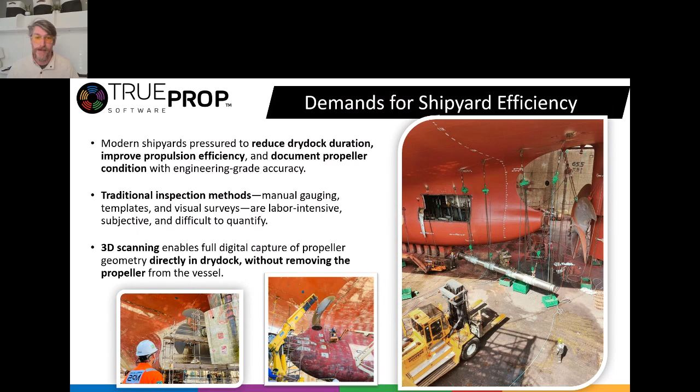Now, traditionally, propeller inspection has relied on manual gauging, templates, and visual surveys. These methods are very time consuming. They're subjective sometimes, and often they only provide partial geometric information about the propeller. So today, full 3D scanning allows us to digitally capture the entire propeller geometry directly in the dry dock. We don't have to remove the propeller. This allows us to create a precise digital model that can be used for inspection, reporting, and even further engineering analysis.

The key benefit for shipyards and people managing shipyards is the time and cost reduction. Many yards traditionally remove the propeller from the vessel and outsource the work to a dedicated repair shop. Removing the propeller requires a crew, scaffolding, cranes, rigging, transport, and all the associated costs. A slightly better solution is to outsource that work to a mobile propeller service to perform it in the yard. But nearly all shops use some form of manual measurements. So by utilizing full 3D scanning tools, there's a major opportunity for significant savings.

First, dry dock time is expensive. Rapid in situ scanning can reduce inspection time from days to hours, freeing dock space sooner and improving the yard's throughput. Second, labor costs drop significantly. Instead of large crews taking manual measurements at multiple stations on the propeller, a small scanning team can completely capture the geometry in a single workflow. That reduces scaffolding, rework, and repeat inspections due to missing data. We capture a full model of the propeller so that we don't have to go back.

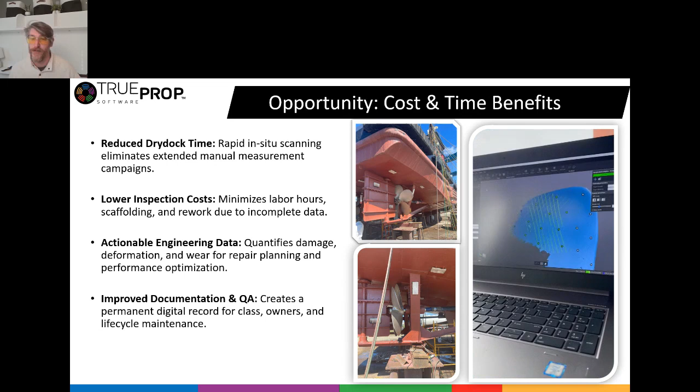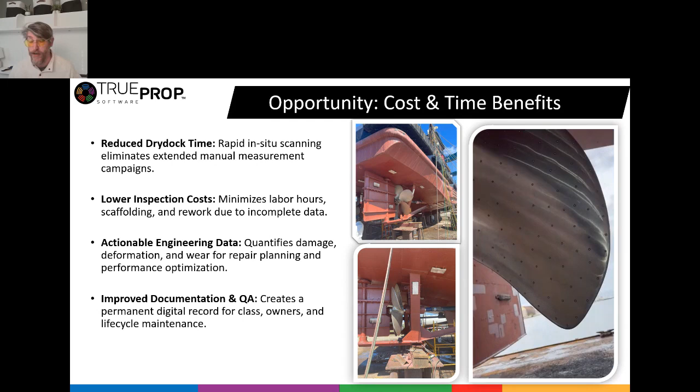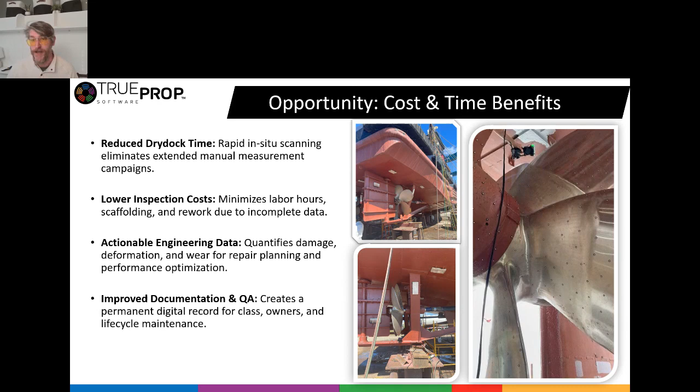Finally, the 3D model becomes a permanent digital record. The life cycle of a ship may be up to 50 years, and it may go through multiple engines and multiple propellers, so having a full 3D digital model is really important. It supports QA documentation, owner reporting, and life cycle monitoring. It allows you to look at future performance optimization. So the conclusion here is that 3D propeller inspection transforms dry dock surveys from a manual check into a data-driven engineering process that saves time, reduces cost, and improves technical outcomes.

So let's look at what this means in practice. In a typical dry dock, a full propeller inspection using manual templates and gauges can take 1 to 3 days, depending on the size of the prop and the access. And if you had sent it out, paid for the rigging and the transport to a specialist, you're waiting on their schedule, and then they send it back to you. That might be a 1 to 2 week turnaround time. With a modern 3D scanning workflow, that same inspection can be completed in a few hours.

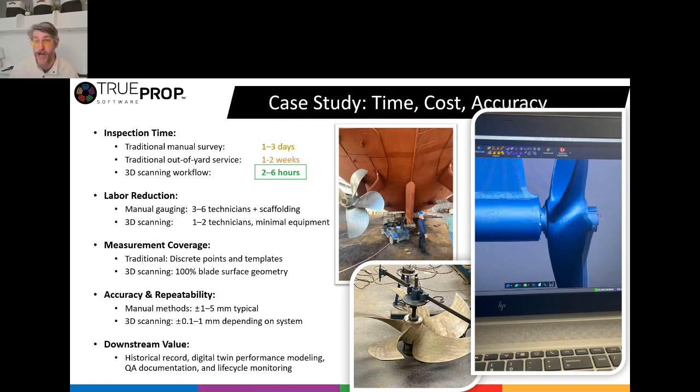Now let's look at the labor differences. This is another major factor. Manual surveys often require multiple technicians, scaffolding, and repeated access to the prop. With 3D scanning, we could do that with a small team, usually just 1 or 2 people. Recently, we did a 110-inch prop with 2 people, and it took 4 hours to do 2 props. That allowed us to capture the entire geometry, both sides of the propeller, which aren't traditionally inspected. A lot of times they're focused on the pressure face.

So now we're getting a full 3D of both sides. And that kind of brings us over to measurement coverage. This is where the real technical shift happens. Traditional methods, they measure discrete points and sections.

Now the 3D captures the entire blade surface, every square millimeter, allowing us to detect subtle deformation, erosion, and manufacturing deviations. The accuracy and the repeatability, they're significantly improved. Depending on the scanner, we can actually achieve sub-millimeter resolution.

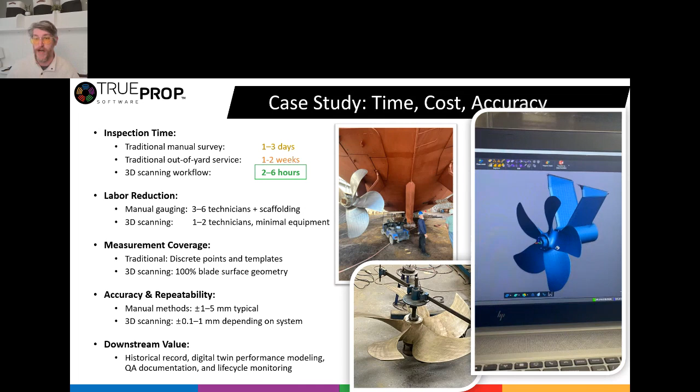And it's a non-contact process. There's no deflection in the template or the drop rod that's probing physically on the surface. So the results are super repeatable, digitally traceable. And the output is not just an inspection report, but it's a full digital twin that can be used for repair planning, documentation, and long-term performance tracking across docking cycles.

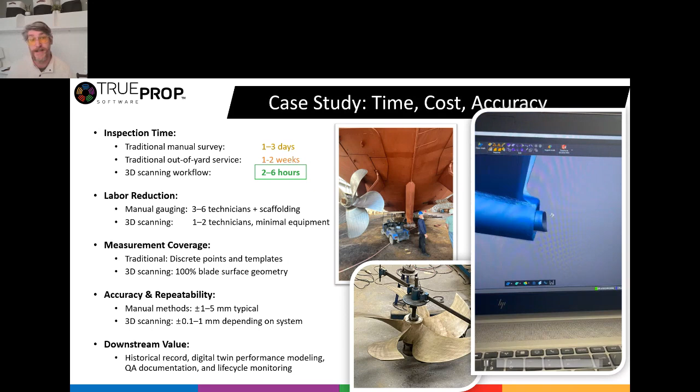So all of this enhances the outcomes for the shipyard, and it provides numerous benefits that can instantly give you a return on your investment. So now let's talk about propeller quality.

Any propeller that you inspect, even a new propeller, will have some geometric variance between the blades. Now, whether this variation was from the manufacturing operation, delivery, installation, striking something during operation, we know that variation will have some effect on the prop's performance. So we'll just refer to the variations as damage now. It may not be damage, it may have been born that way, right?

So damage to even a single blade, it changes the loading on the blade, which leads to more losses, more imbalances, and that directly impacts the efficiency of the propeller. So that's less thrust and higher power requirements, and that's going to reduce operating speed, higher fuel bills, more noise, and more vibration. And if left unrepaired, that can really damage the bearings, gearboxes, and other things upstream, due to those eccentric forces and imbalances.

So, these propeller issues are common, and not all of the damage is obvious from a visual survey. And that's why regular inspection of the propeller is so important. And again, if you are struggling to fit propeller inspection into your dry dock schedule, this is a way to accelerate those timeframes and get even better data out that covers that for you.

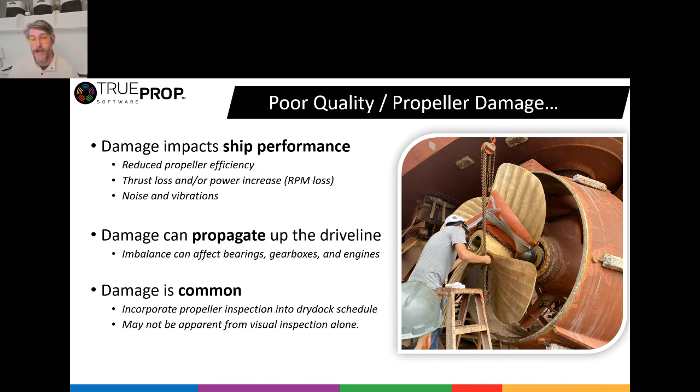So when we're inspecting a propeller, we are checking the geometry of each blade to minimize that variation between the blades. It's that variation that really alters that relationship between speed and RPM and engine load, and differences between blades or damage to blades. Sorry about that, gotta go back there. That leads to reduced top speed, increased fuel use, all that stuff.

When we inspect a propeller, even with gauges or manual measurements, we are taking pitch measurements for each blade of the propeller. And a lot of times we'll visualize these with bar graphs where there's a tolerance and there's a window of acceptability. And then we're plotting each blade against that. And we break this down by blade, by radius line, and we even break them into smaller segments.

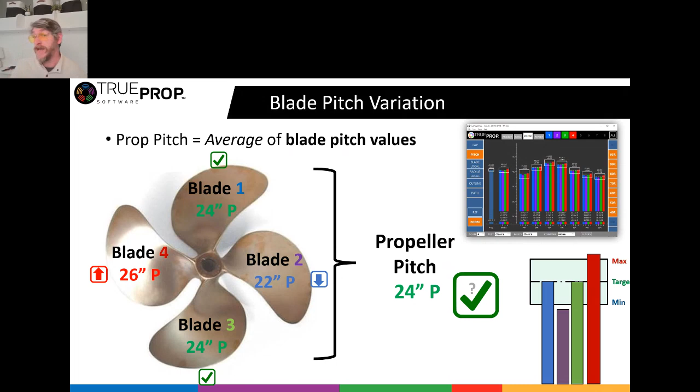Sorry about that. That measured pitch can vary from the target pitch by some specified amount. So it's really important that we're checking to make sure that all of our measurements are within this window. So whether you're doing it manually or with 3D scanning, this is kind of the objective, is to check those and balance those out.

So how do we know how much variation is going to be acceptable? Professional repair facilities use a standard called ISO 484. That's a manufacturing tolerance for marine propellers. And this standard has long been the metric for inspecting both commercial and recreational ship propellers. There's 4 classes to document the condition. S is the tightest class level, then 1, 2, and 3, with 3 going to the widest tolerances.

And those inspection methods, they're outlined in ISO 484, and that's what's used to calculate the geometry for each blade. This is the standard that we use for compliance. So, what our team does and what our software does is basically allow us to go from the 3D model or the inspection data to the documented report. And that's really the end goal of this, is to document compliance, right?

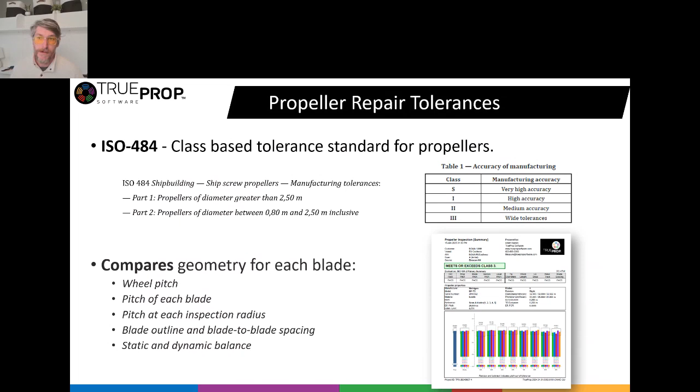So let's look again at kind of how this process works. We're leveraging commercial metrology equipment. Typically, this is handheld blue light laser scanners. And that gives us a new way to inspect the propeller, again, without having to send it away to a specialist, without having to remove it from the ship or pay for rigging and transport. So in scenarios like maintenance and dry docking, that's a super valuable thing. Again, it accelerates the timeline and it reduces cost.

And there's lots of options for 3D scanners today. They are very accurate. Typically, they're much better than the traditional probe-based measurement tools or the gauging and the template option. And one advantage is if you scan the propeller and it's in good condition and you haven't removed it from the ship, you're bypassing a lot of unneeded labor for the removal and for the rigging.

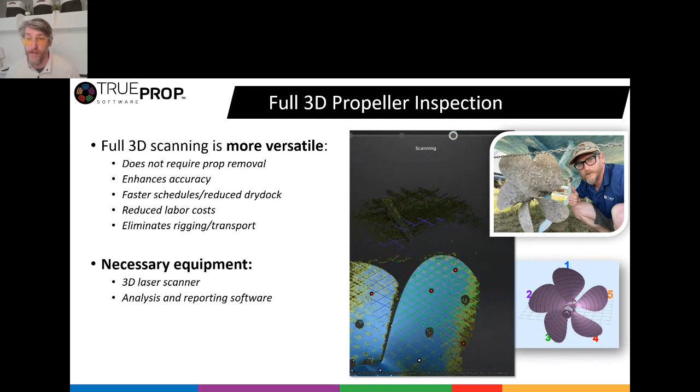Here's another example. We can see a large propeller being scanned. I want to point out that this technology can be used for propellers as small as 8 inches and as large as 160 inches, which makes it super versatile. It's great for controllable pitch propeller blades. It's great for high blade area blades with overlap because you can move that scanner in between the blades.

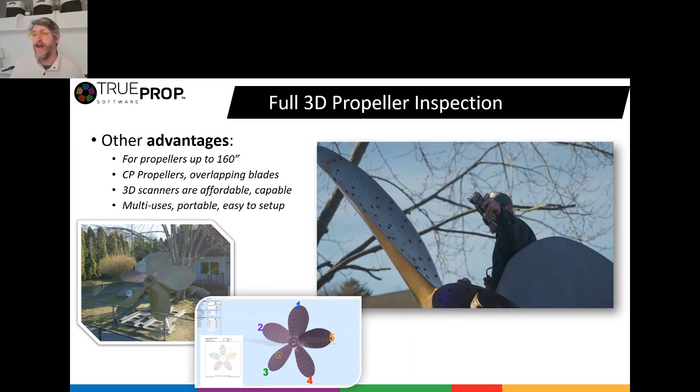And our TrueProp software, our solution, supplements this and makes it really useful. It takes that 3D data that's captured and it extracts the data needed to check those tolerances across the blade. It produces a report that documents not only the 3D shape of the blade, but it's actually giving you the tolerances across the blade. And it shows you any areas that are out of spec for that desired class rating, S, 1, 2, 3.

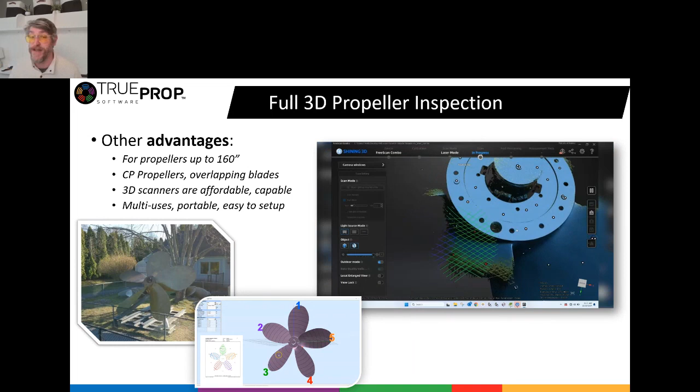So this software is compatible with anything that outputs an STL mesh, and that includes older metrology arms with laser scanners that some machine shops might already have. So you don't need a handheld laser. You can really use anything that makes a digital model, which makes this extra flexible.

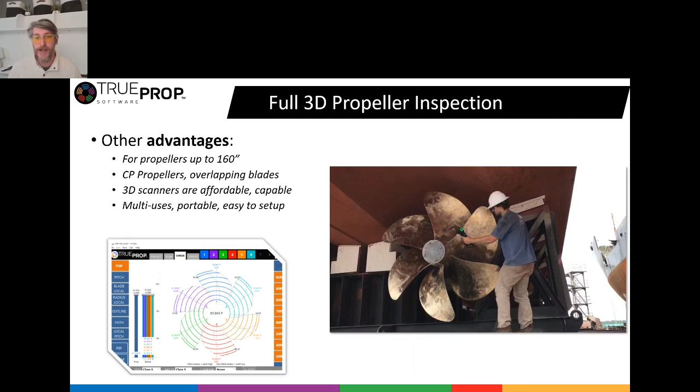Here's another large propeller being scanned. I'm not sure what size this is, but this is, I believe, a Coast Guard wheel. And just another interesting process. You can see how fast he is going through scanning that prop. No other specialized equipment really needed beyond the scanner that he has in his hand, the laptop here.

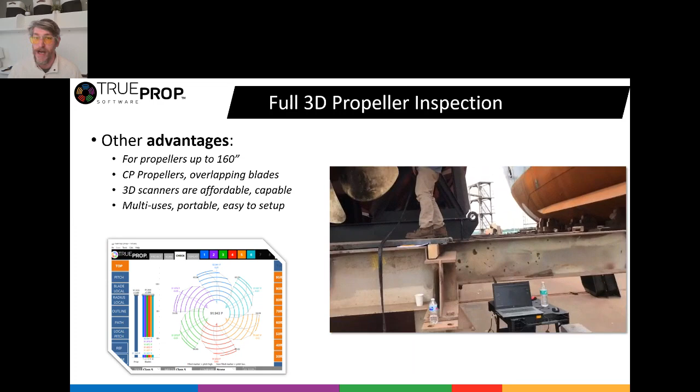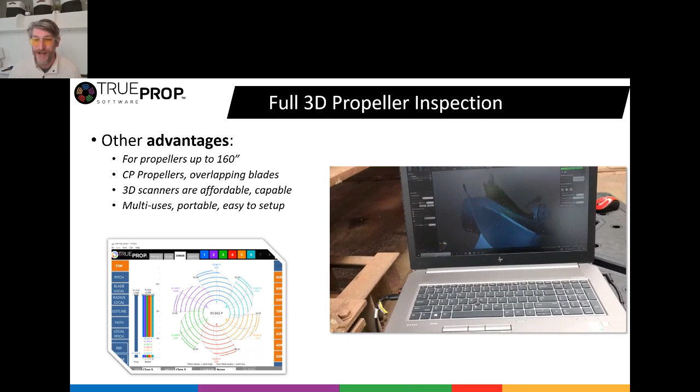And you can see that there's a second operator in there who's kind of helping him. He's watching the laptop, making sure all these areas are captured. So again, 1 to 2 operators, and that would cover you up to 140 inches, 160 inches. I don't see any reason why you would need more than 2. So that's a huge advantage, right, on labor.

And I wanted to show you a few more images here of different scanning processes. We can see a large propeller being scanned. You can see in the hub region here, there's some overlap between the blades, and it's also very, very steep, which would be a little bit troublesome for our typical drop rod based approach. So by going to the 3D scanner, no issue at all.

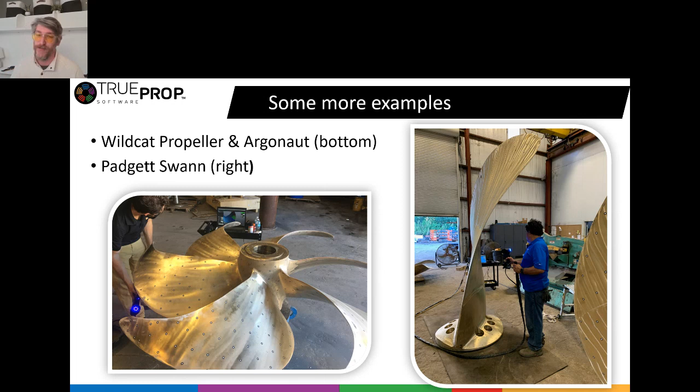And the other example I'm showing here is a CPP blade. So we can inspect these CPP blades without any sort of fixture or original hub or a dummy hub that would traditionally be used. We can just orient the scan model in CAD and analyze it. It's a really, really cool strategy.

Scanning the propeller into a 3D model alone, that's kind of the first step. But to make really good use of it, you need another layer to extract and interpret the necessary data. That's just what our software does for these types of models. Here's a couple examples of the screens there. We can see that we get a 3D model.

We are mimicking the traditional process here with scribe lines at set locations like they would do with a template. But we're doing it all digitally, so it's very quick. It's easy to revise. We are getting the lines that show us the shape of the propeller, and then we're actually showing areas that do not meet compliance on the leading edge of this blade here out at the tip. So this particular surface piercing propeller had some issues.

If we zoom in down here at the bottom, we can also see some regions that are out of compliance right here. You can see that they're exceeding those tolerance windows. And that's why we're looking and noticing damage and quantifying that, identifying it and documenting it.

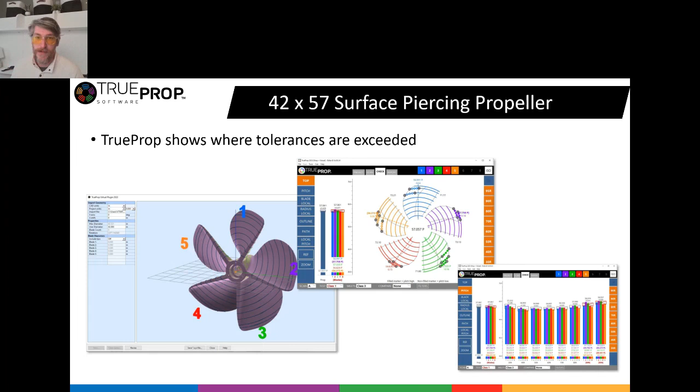Just another example here. This was a large propeller that was inside, I believe it's a tunnel thruster. And so access to this was pretty difficult. It was inside of a tube, basically. But 3D scanning allowed us to capture that geometry without having to remove it. And we were able to extract data right out of it.

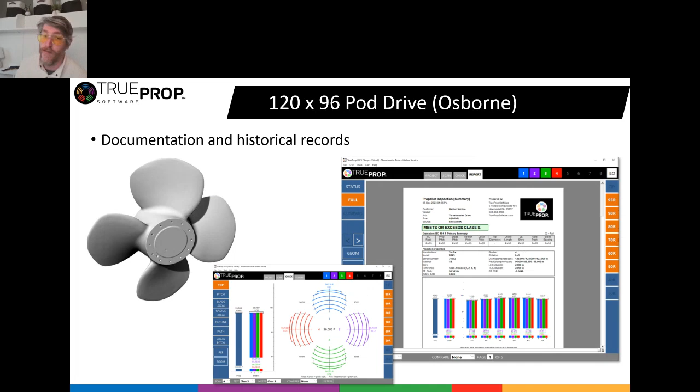Pretty basic design, some pretty tight tolerances. Nothing wrong with this prop, so it was good that we didn't remove it. This propeller here, I believe it's 120 inches. So it was a very big propeller and would have cost a lot to remove.

We can maybe calculate some areas, volumes, and weights, but we want to know pitch, diameter, thickness, and things like that. So, depending on what your objectives are, from the 3D model alone, if you have something to compare it to, maybe another scan or a CAD design model, you can quickly get a heat map. That's a really useful visual, very compelling. It tells a good story, right? But that doesn't tell you anything about the condition.

So we would use TrueProp here to basically check the propeller against its design specs and analyze the tolerances, determine the class. We would also use a product from HydroComp for more or less recreating blade geometry, creating a drawing from a blade to supplement missing documentation, or to create a new blade for manufacturing, to get a new pattern made, a new propeller made based on the scan data we pulled. So there's a lot of things that you can do with that so-called digital twin model.

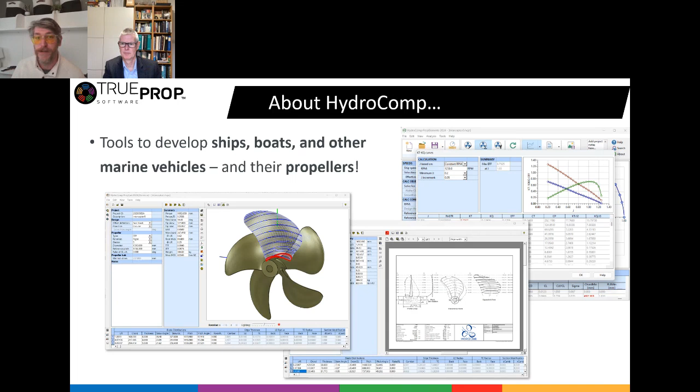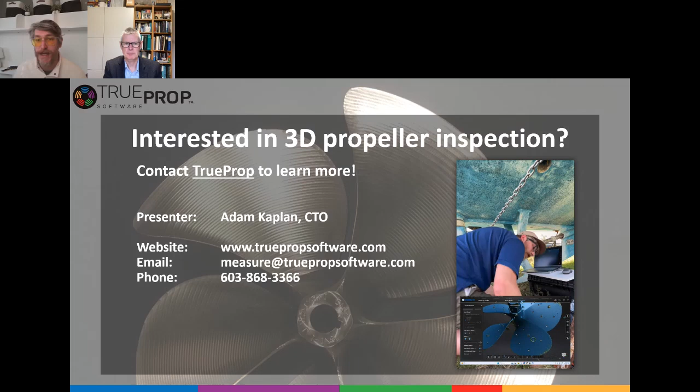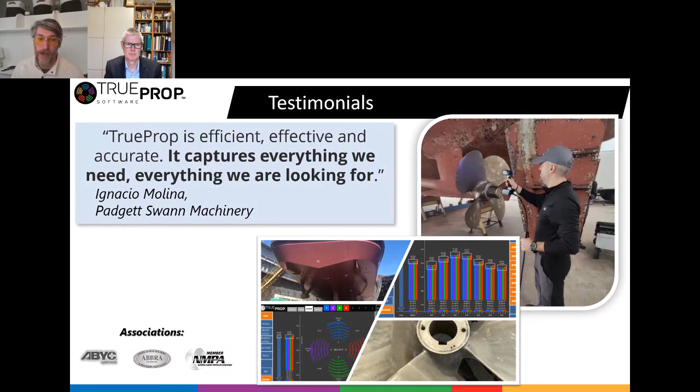So we've got a question here that says, how do you calculate the pitch at a certain radii? Sure. Essentially, it comes down to a geometric formula. Really, it's about the angular span across one of these lines. Let me see if I can get to a good slide here. So we have these lines up here. We're looking in cylindrical lines.

So what we need to do to calculate pitch, we're identifying an angular span and we're identifying a drop. And it's essentially a ratio between those two. The formula itself is a little more complicated, but those are the two measurements you really need, the angle and the drop. And that's really what we're extracting out of the 3D model. Okay, thank you. And then a supplementary: is it possible that there might be no scanned points along the radii?

Well, I would say it depends on your scanner. We have the ability to select the spacing between the points on most 3D scanners today, and the density is usually 1/10 of a millimeter by default. We can up that to a millimeter, or to 5 or 10 millimeters, depending on the size of the prop. What will happen is if the points are not directly on the radius line, when we make a mesh out of the point cloud, it will interpolate over that.

So we'll essentially have a small panel there instead of a single point, and then we can pull an intersection from it. So it's a very accurate method and pretty standard for CAD programs to do that type of interpolation. So as long as your point spacing isn't too high, you'll have no problem at all. Very good.